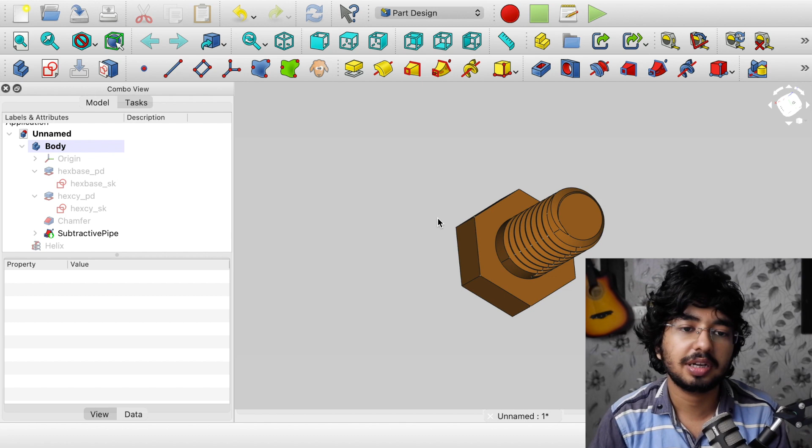So what you can do is nothing. So this is the nut which we are going to create. Again, why do I keep switching this? It's a bolt, not a nut. And also, if you are a complete noob to FreeCAD, I'll explain you everything, please bear with me. This tutorial will take a bit long because I'll be teaching you a lot of things, and after you learn this you will become good at FreeCAD and threading and how to cut stuff and so on.

Alright, so let's just start with this is how, if you open an application, this is how it looks. Alright, so this is the FreeCAD software, and you might see some different colors. It's completely free. You can just go to freecad.org and download it.

So now we will just go and create a new document. Okay, so we will create an application, and let's just save it, call it bolt. Okay, yeah, bolt, hex rod, or whatever. And also you can see whatever key I am pressing in the corner, so keep an eye on that as well.

Right my friends. Yeah, so this is not a programming tutorial, obviously, right? You guys are bored of programming, so am I. That's why I am doing this FreeCAD.

Alright, so in this basic workflow you have some things here. You have workbenches. So part workbench, part design, we will be working in these two, and most of the time you will be working in these only. So make sure you are in the part design. Click here, and if it is not viewable, then you can go in view, and see, you have a status bar at the bottom as well, so you can toggle stuff. Just try to explore here, and in the workbenches you can just change from here.

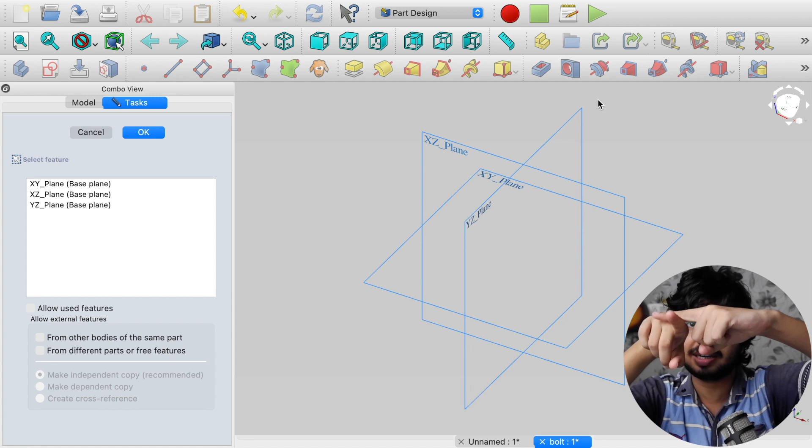This is the sketch button. So in sketch we draw things in 2D. Yes, in 2D. These are the axes, you need to understand this. So this is XZ, this is XY. The flat is XY, and XZ is in this direction. Yeah, this is XY, okay, you get the idea. You can select from here. We will be building this on a flat surface, so I will just go with this XY plane.

Okay, hit okay. Alright, now this is the 2D. This is a 2D thing. So you can view this in 3D as well, but you need to draw stuff here in 2D. So first we will draw this base, right? The back thing which we have here, right? So then we will cut it through. So we need something like this.

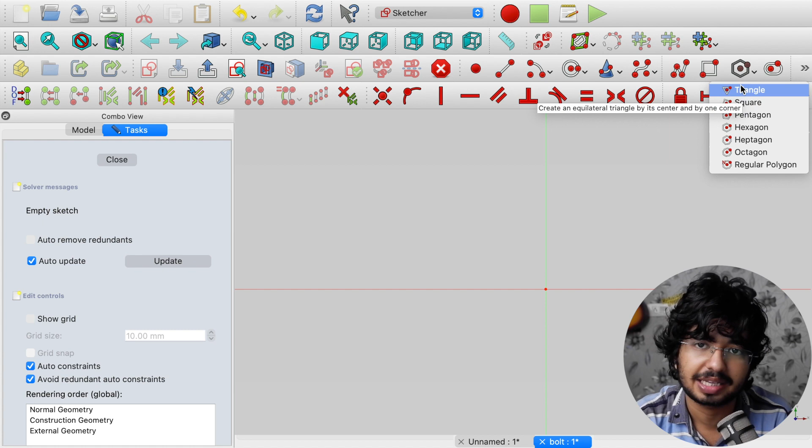So here we simply can click this tool. If you are not able to see, just click here, and you can drag stuff from here and move around, right? So it's pretty cool. And I'll just create a regular polygon. You have a lot of shapes here as well, so I'll use this, and I'll go here in the center. You can do this later as well, but I'll show you. You can draw here by clicking here, or let's draw here. You might not see because I am having color issues, and to get the arrow you just press the escape key. Okay, I exited from the sketch. Let's go back.

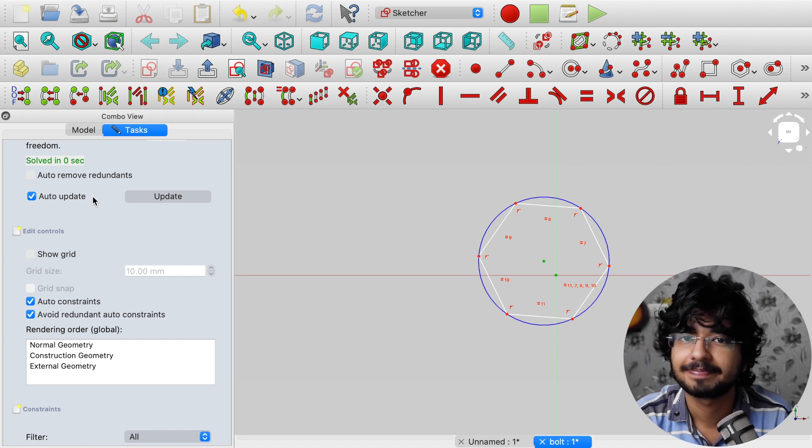Yeah, so I can drag this and I can move it around. Okay, but what we want this to be fixed. So we have something called constraints to make these things fixed so that they don't move or we don't create some undesirable things. Okay, and we can just change this radius of the circle.

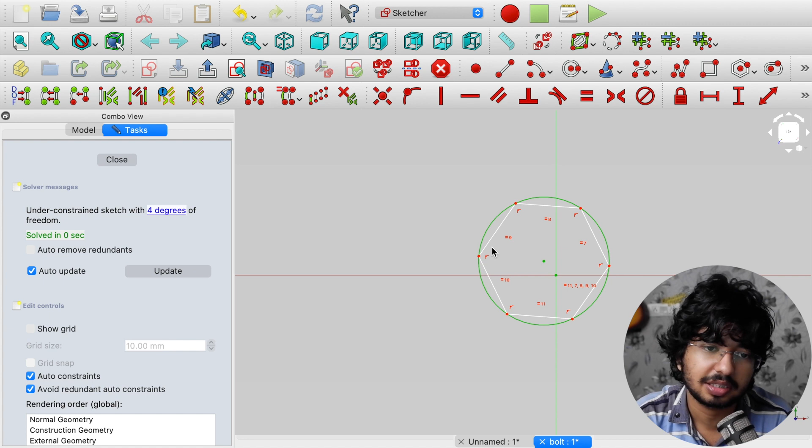So you need to come and click this icon. Here you will find this fixed diameter. I'll click on it. I need this, select this arc, and again go and click on diameter. So it is asking for the diameter of the hex.

So I'll just keep the outer diameter to 15 mm, and I am giving some name to it. It's always a good practice to give names. I'll hit OK. So it has become bigger now. And the thing is, I can't resize it now. See, I can't. It will just rotate.

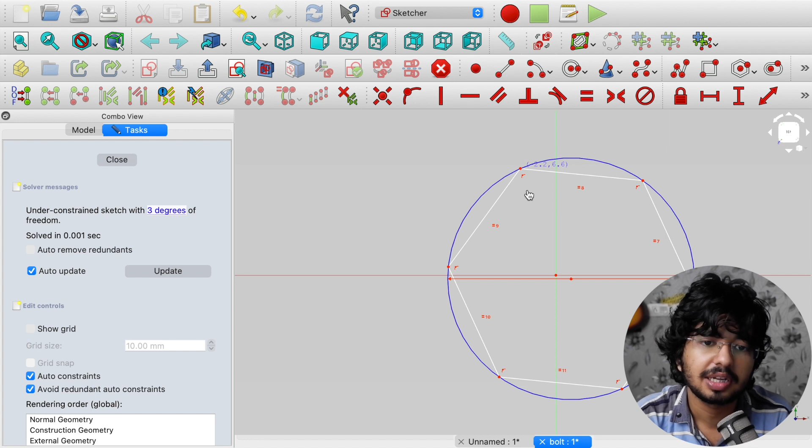All right. But also what we want is this and this to be fixed. The center should be the same. So you can just click this center tool. Let's just get rid of this. Okay, so you can press this, create a coincident, or you can just press C. Like you can also do this and this.

Alright, perfect. So everything is clear till now on how we made this to center, and now we can't do anything. We can just rotate this. So there is also a way to fix this. How can we fix the rotation?

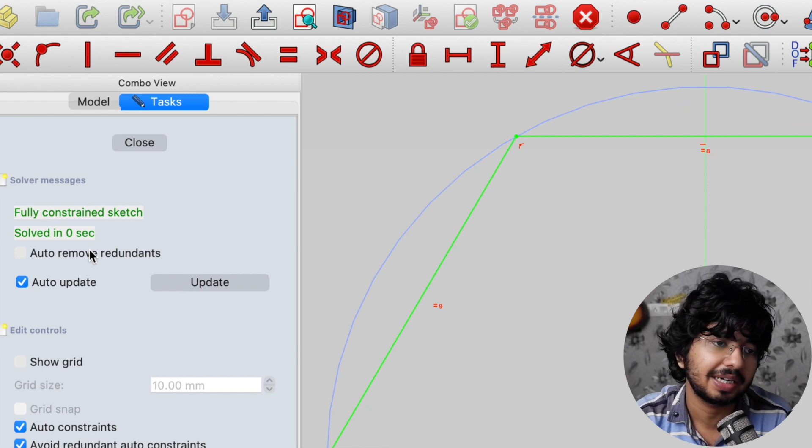So we can just make this line of the hex, this line, and here we have this tool. Guess what this tool does? Create a horizontal constraint. So horizontal is this, meaning it will become horizontal. And now you can see at the right, it tells you fully constrained sketch. This is the result which you always look up for.

So now I cannot move anything, and we have all the dimensions. If I can drag this like this, and if I want to change this again, I can double click and do stuff. Okay, cool, perfect. Let's close this sketch. Always make sure to close this, and let's name this.

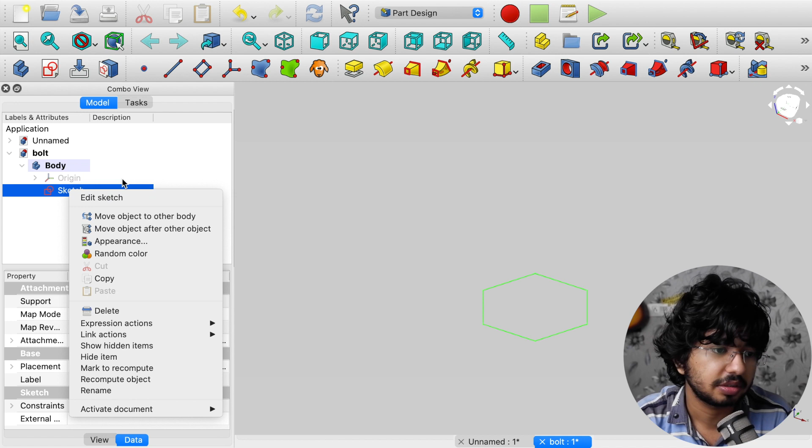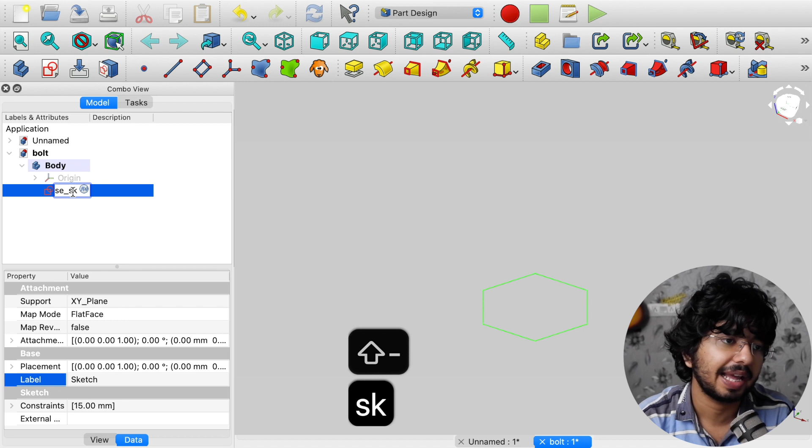You can right click and rename, or just, where is it? Yeah, here is this label. You can edit, or you can simply press enter, and let's call it the hex base. For sketch I am calling it SK. Pretty cool, hex base sketch.

Okay, so how do we extrude it? How do we make it like this is flat, and how do we make it go up? Yeah, one line we have got here. So this is in, you can see this is in white. So all we need to do is just create this, and we will do a padding. So what is padding? Here in pad it means this is a flat surface you want to extrude.

Yeah, so I'll show this in action. I click it, and you see what happens. And if you want to reset this, you can always press 0, or you can go to this. You can just press VF. You can press this. The scroll button just zooms in and zooms out, and you have to shift right click to move stuff.

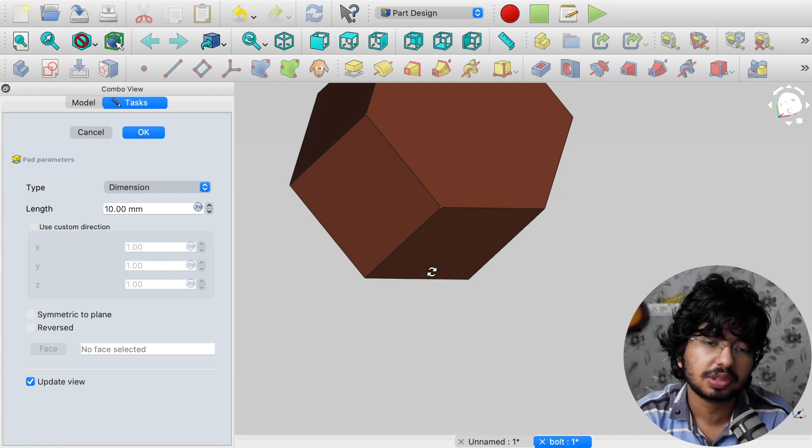See, shift, hold down the shift key and right click on your mouse and move. And if you want to drag, you need to click the middle button on your mouse. Pretty cool. So make sure you are familiar with this, and by just clicking single click you can select stuff.

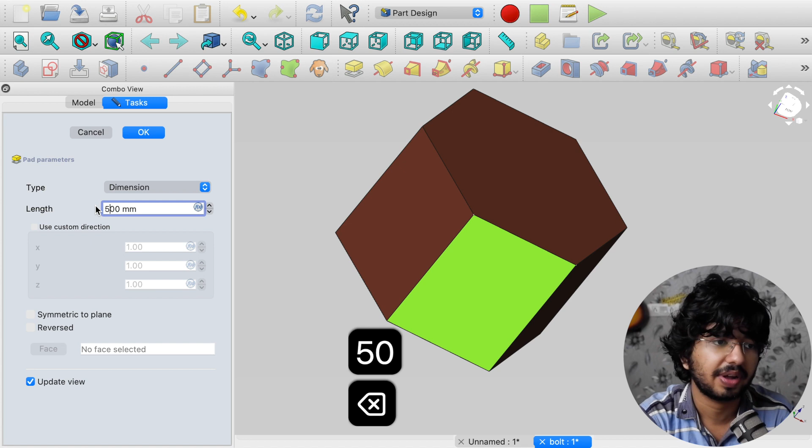Yeah, this is cool. So if something gets hidden, you just click here. See the cool animation. Okay, and you can also do a lot of stuff here, but we will look into it later. This is one part we got. I am middle clicking and dragging so it moves, and if I scroll wheel, see, yeah, cool.

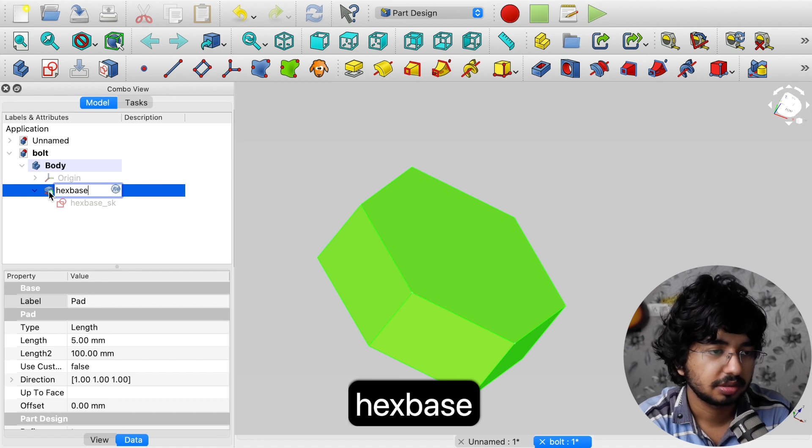Okay, we are done here, so we will just hit OK, and we will rename this again to hex base pad. This is all, or you can just say PD or pad PD. Let's make it PD. Okay.

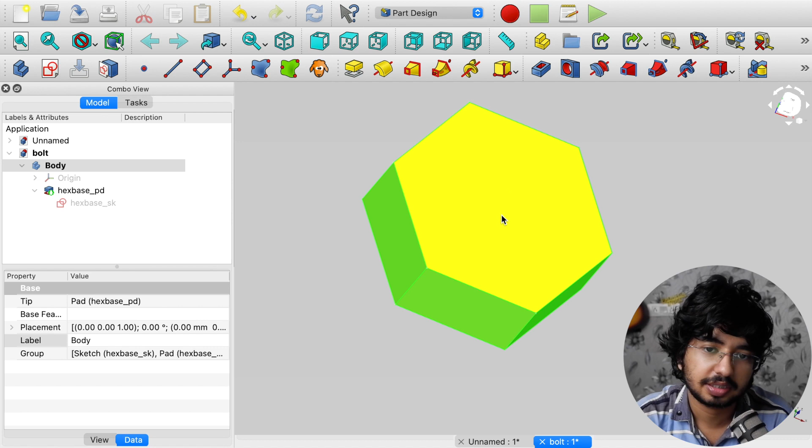Okay, and this is it. I guess this is not the end of the tutorial. Now what we want is we want to create a sketch, another sketch where we will build this thing. We will build this, then we will cut this portion out. Okay, so let's build again a sketch. Click on this sketch icon, and we want it to be here, so we can just click OK, I guess. No?

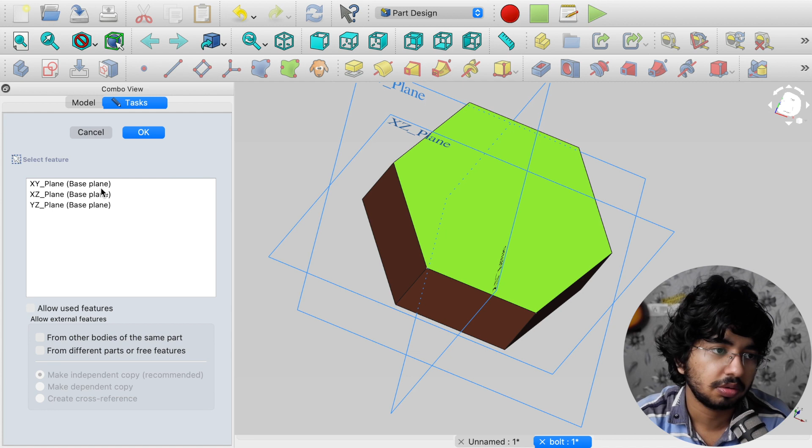Okay, so we are again going to click on the XY plane. This is the flat surface where we will build. Hit OK. So here you have one thing - what is this? The dot is missing. You just need to click this icon, this little icon, and it will show up stuff.

Now we will just create a circle. It is pretty easy to create a circle. Where is it? Here? No, yeah, the circle. This is the circle, create a circle. I'll just click on it, and I have this circle, so I'll drag and create.

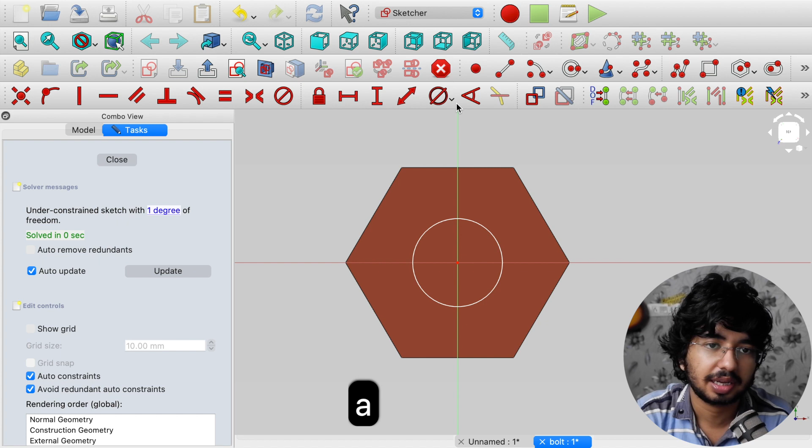Okay, so whatever thickness you want to give this, I mean diameter, this will be the diameter here. So we can just change it again, like as I showed you. I can just click on it and click on this diameter, and let's make it 8. Okay, cool.

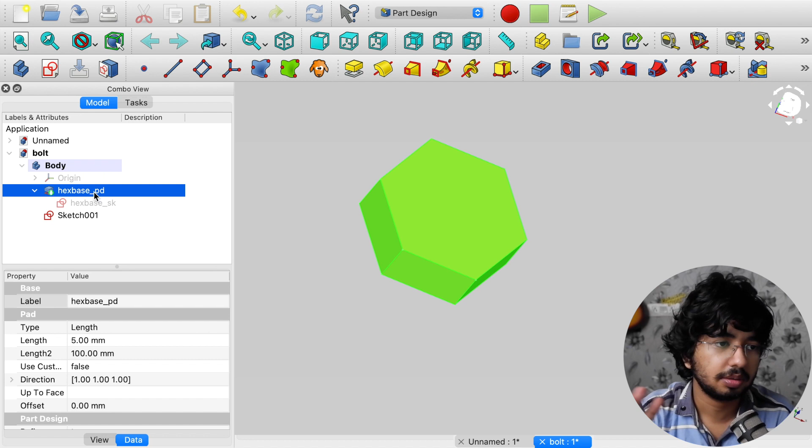All right, we have it fully constrained. This was easy, so now we can just close it. Okay, so the circle we made - one very useful thing which you need to know is you can press space and things will hide. It's like layer hiding, and this is the history we are creating on. To view the origin, you just click this. Don't get confused, this is the origin, the sketch we made on the XY plane.

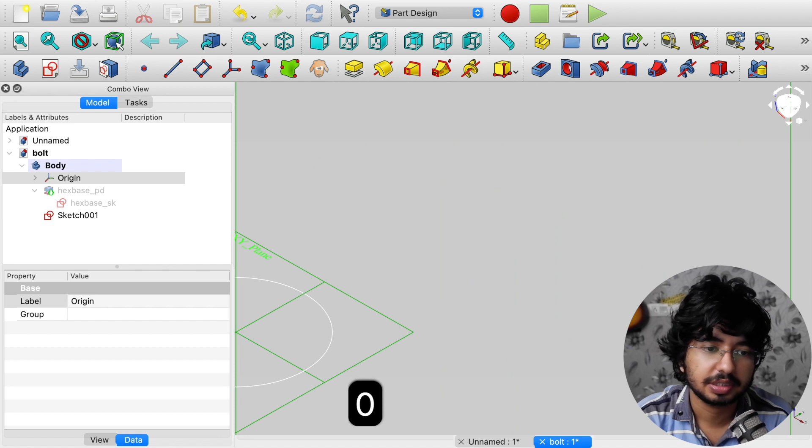Hit 0 to reset it, and let's rename it hex CY. Hex CY means cylinder sketch. Cool, pretty cool. And you may try to move this, maybe - let's see if we can. No, we cannot move this because this is in the XY plane.

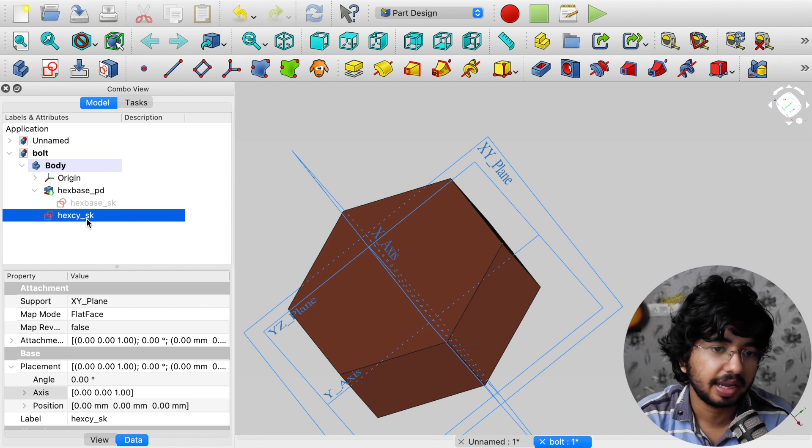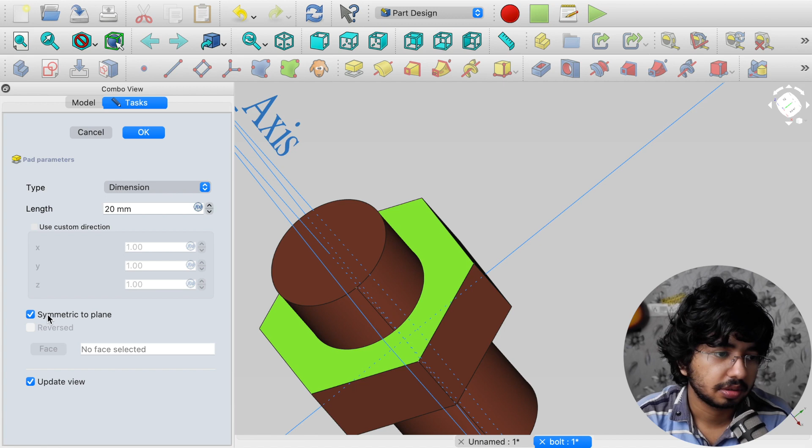Okay, if it's in some other plane, maybe you can, but I'm not sure. So alright, let's view this back, and if we rotate this here, so we have this. Okay, so we will do the same thing again - tell me what we will do. We will again create a padding. Okay, so this is what we got. Let's make it 20. Yeah, this is fine, symmetric to plane. No, this is fine. So this is what we get.

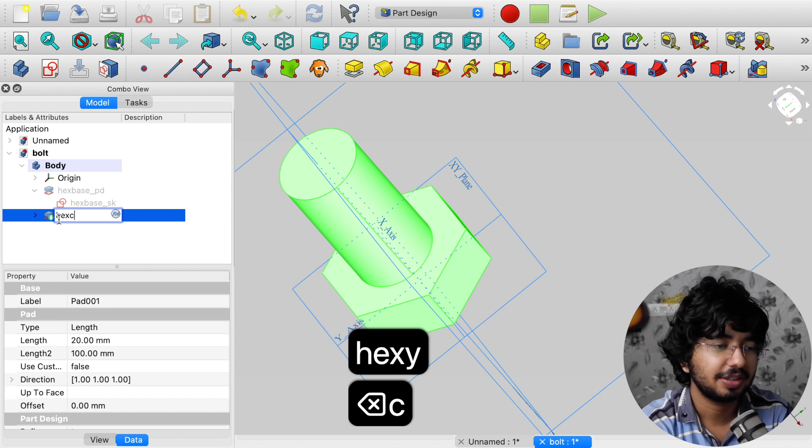Hit OK, and if you want to change the color, you can right click and click on random color. Right click, random color - yeah, see, this looks cool. Again we will rename it hexcy_pd. Not the best naming convention, but it's fine because we will be taking references from it. So I guess this is all clear. This is how we build this simple stuff. Right click, hold shift and rotate, and boom boom boom boom boom.

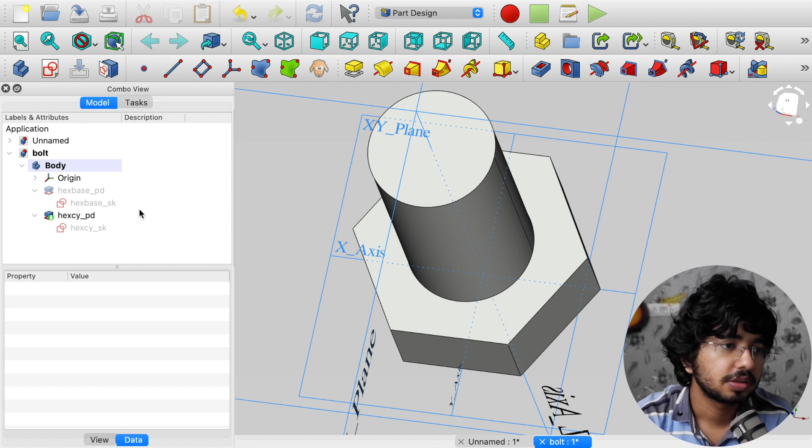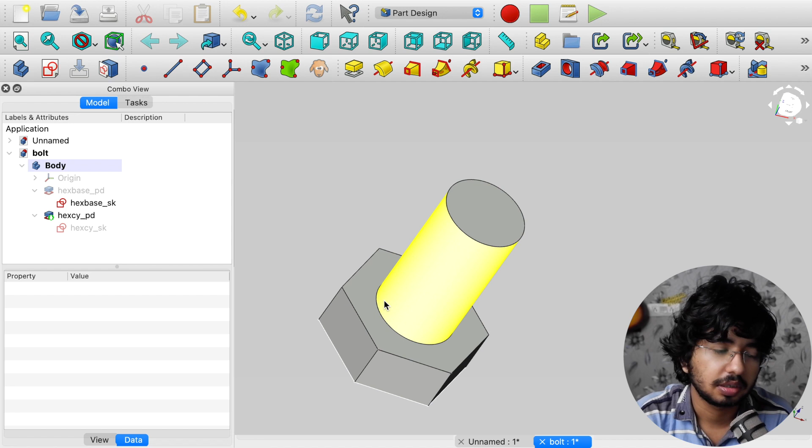So this was cool. And to make the threads, what we need is we need to create a helix. To do this, we need to go in part, and we need to create on this guy. Who is this guy? Creation for parameterized. Okay, yeah, just click on it.

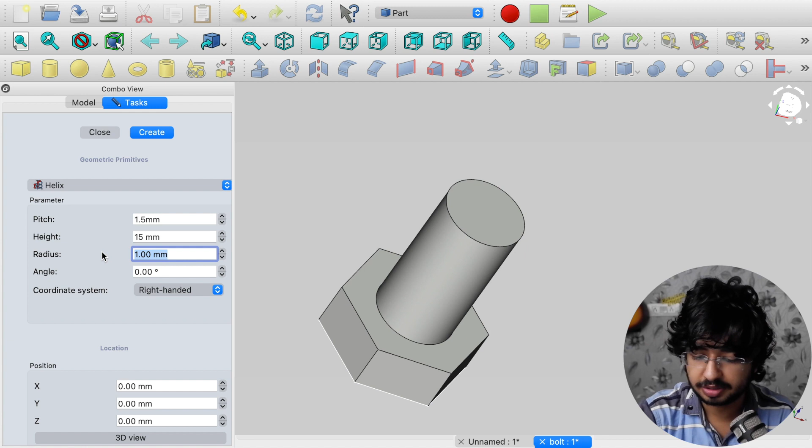So we want to create a helix here. And the pitch - what is pitch? Pitch is, guys, the distance between the two threads. Okay, so we will make it not 100 mm, that's too much, 1.5 mm. You can go to the standards whatever you want. And height will be, right now let's make it 15. And for radius, don't worry, we will just put expressions to it. So radius will be - how much we gave, 8 as diameter, so radius will be 4. Cool.

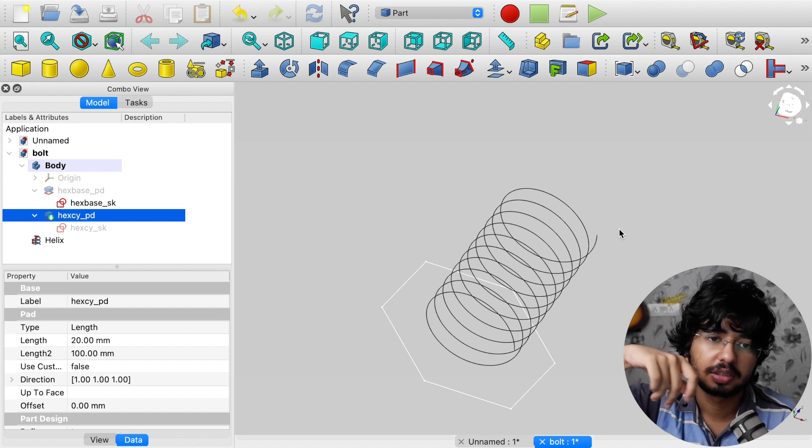Position, let's keep everything at 0 and set the radius to 4. Let's hit create. Alright, you get this, awesome, perfect. Now let's close this. If I hide this, you see this.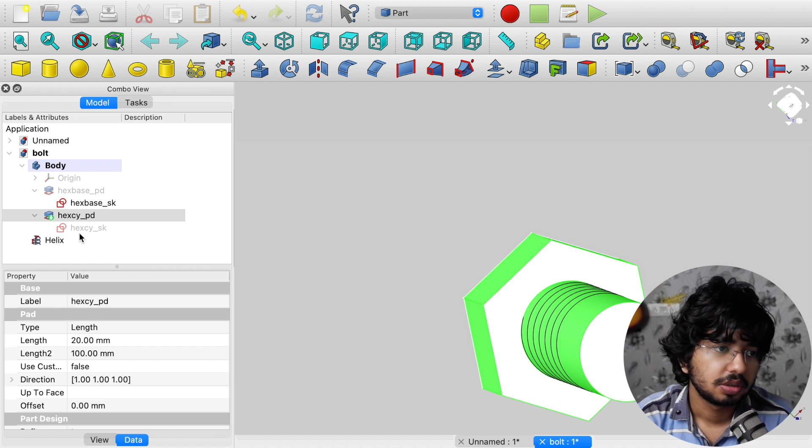This round stuff is the path it made, so that we can groove inside and cut in that manner. Okay, let's use this. What we want is, we don't want this to be going inside, because if it goes inside it will cause trouble. So whatever the pad is, we want to move it upwards.

Okay, or you can manually just put some stuff, right? But I will show you some standard steps you can do to make this solid. Helix, and you can rename this as well. Here is this position, and Z is the top. If I do this, see, it's going up, it is right. So you can manually just do this, right?

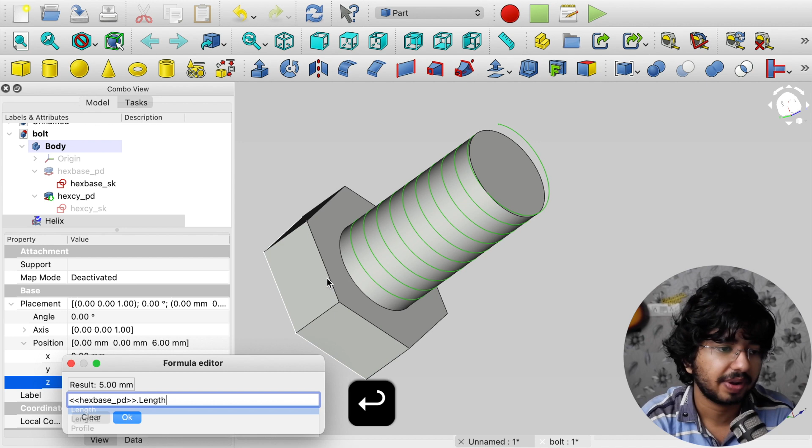But what you can simply do is press equals, or click this little fx icon. I'll press equals and it opens the formula editor, and I can reference the pad. So I'll type hexbase pad, you see autocomplete, and I'll type length. Length is the length of whatever pad we put, so it's the same, now we are at 5. Okay, cool, and this is the...

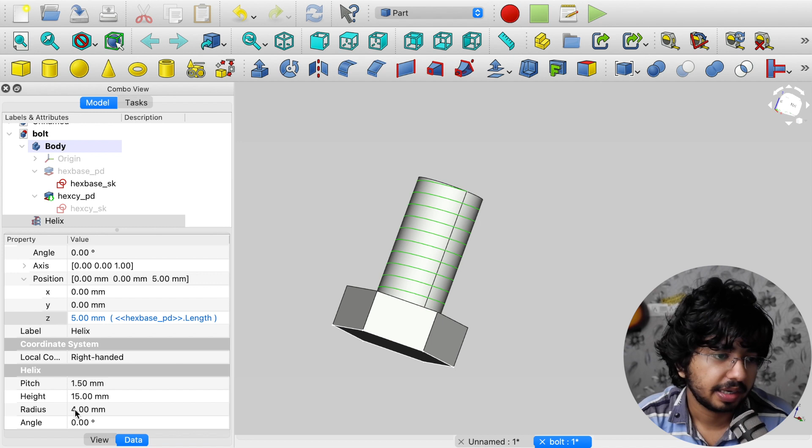Here is this top end. And what else we can do is, in the helix we were doing this radius. So instead of doing this, we will again take the reference from the hexcy sketch.

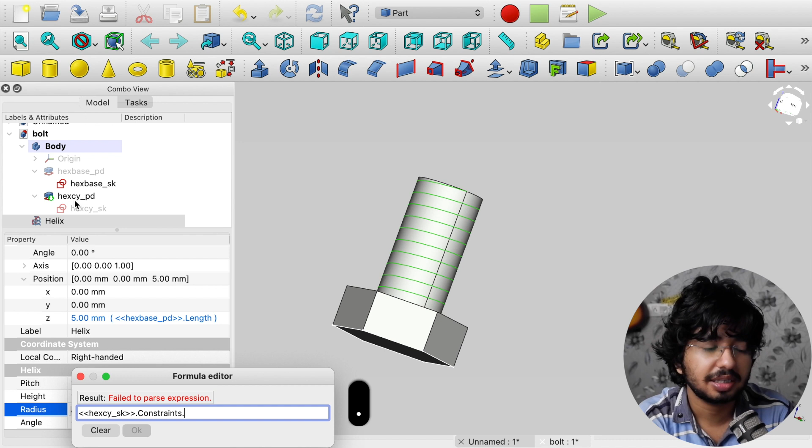So we will go to the sketch and just do constraints. To get the constraints inside our sketch, we do this, and then what we will do is put... what was the name, diam. Why is it not taking?

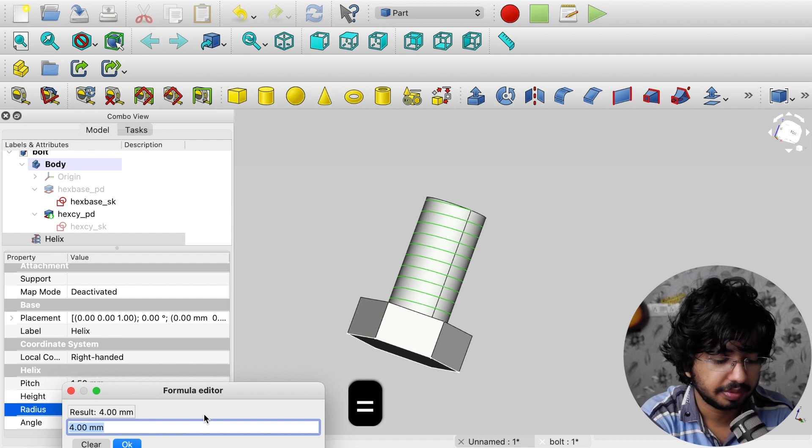Let's just go here, not here, in the hexcy sketch. Okay, so we forgot to give the name, so let's add a diam here and close this, and again go to helix, and in the radius we will do hexcy sketch, constraints, dot diam. Okay, and this is a diameter, so to get the radius we divide it by 2. Awesome, cool, see, no effect, it's perfect.

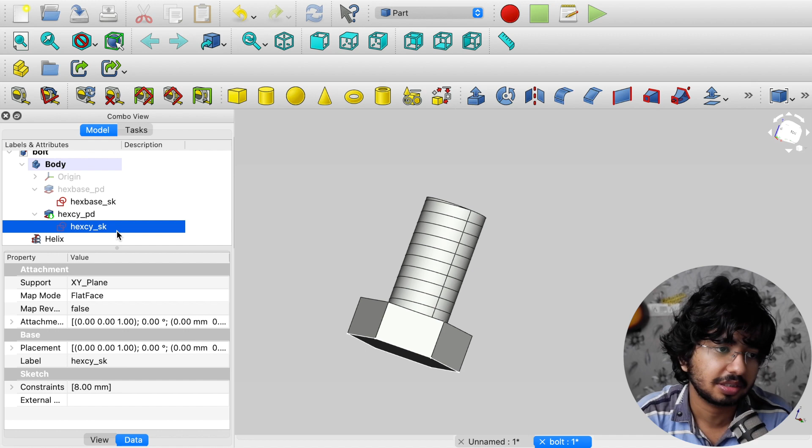So now what will happen if I go and change the radius or diameter here in this sketch? It will get automatically updated. If I make it 9 and go back here, so it is 9. So if I go into helix, see, it's 4.5, and obviously 4.5 times 2 is 9.

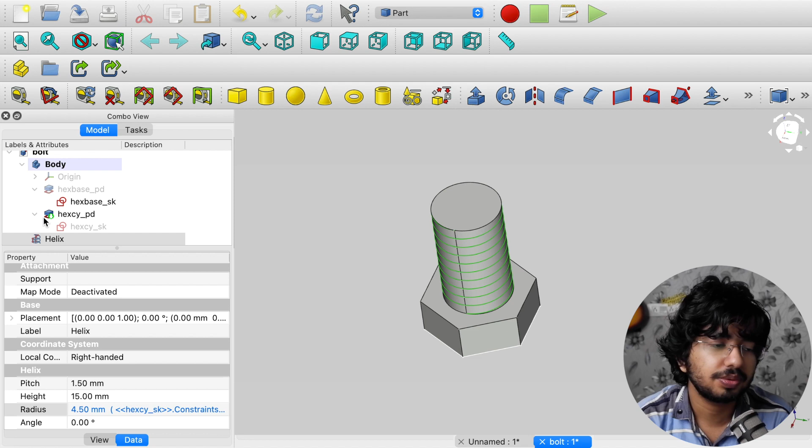Awesome, cool, alright, now let's see how we carve it. Okay, cool, so to do that, we need to create an element which will carve. So we will create a triangle. Now part design is done, so we will just go into the part workbench. Now we will go into part design, and we will create another sketch, and it will be a triangle which will rotate and cut out the parts.

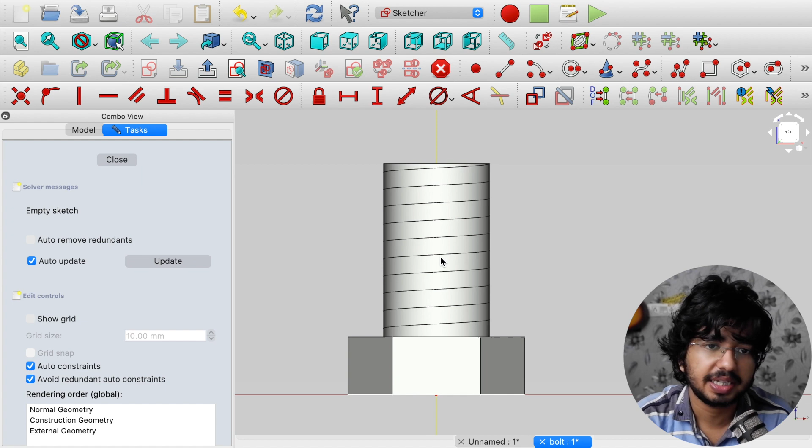You can make it in XZ or YZ, so let's make it in YZ. Okay, or let's make it in XZ. Okay, so we are cool here, and what else do we need? Nothing, you just click this guy so that we see everything in the center. Okay, you can also hide this, go and hide this.

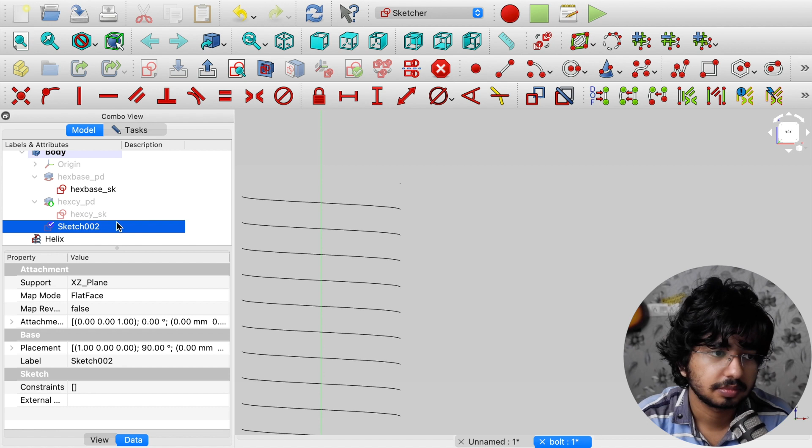And what we need is we need to put the triangle here. So I'll show you how, if you want to do it quickly. This is the tool called polygon in a sketch, and this should match whatever pitch we have, it needs to be an equilateral triangle. So I'll show you how to do it.

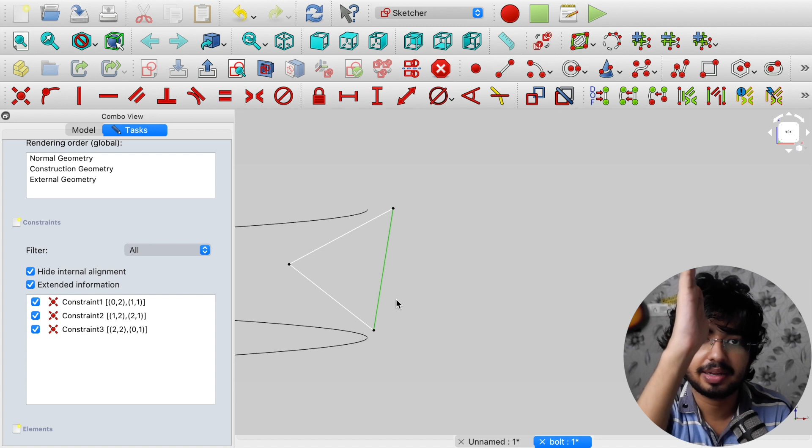Press escape 2 times, and I can do stuff here because there are very few constraints. If you scroll down, you will see all the constraints, you can hide them or delete them by pressing the delete key. Okay, first we want this line to lay vertical, so we will press this. Now this is vertical, and for an equilateral triangle we will select all of this and click this equal icon, so it makes everything equal.

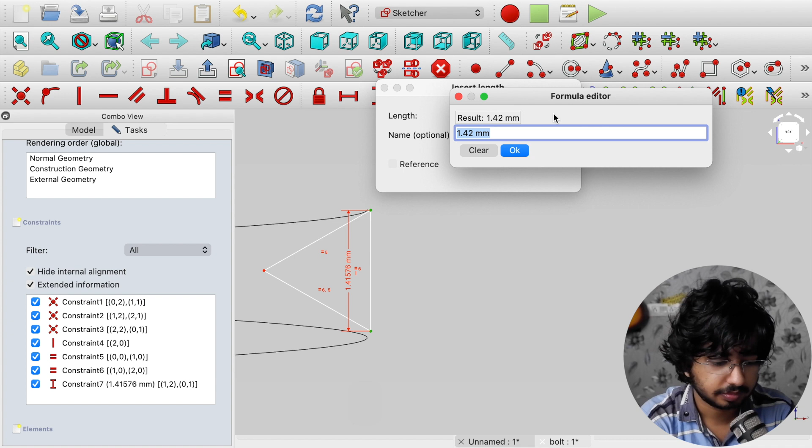Okay, now I can only resize it, but if I want to give this pitch length to it, we will select these 2 points and add a vertical constraint with shift V. And we will take whatever we added as the pitch in the helix. Pitch is capital P. See, it took 1.5.

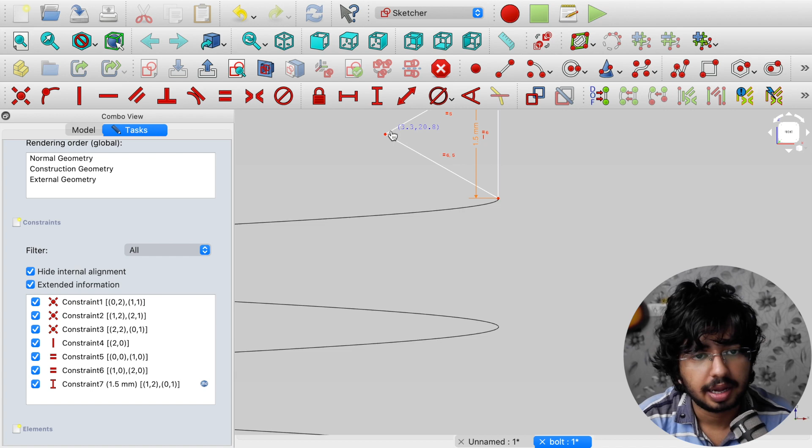So now we have this cleared. This is fine, and if we just position it here, and then we can just do it. But if you go here, it will show an under-constrained sketch degree of freedom.

So to fix this, what we can do is just click on this again. Okay, so center is here. So whatever the base, we can put a length again, the vertical stuff, and make it whatever we had, hexcy_pd, and we will do the length like we did before.

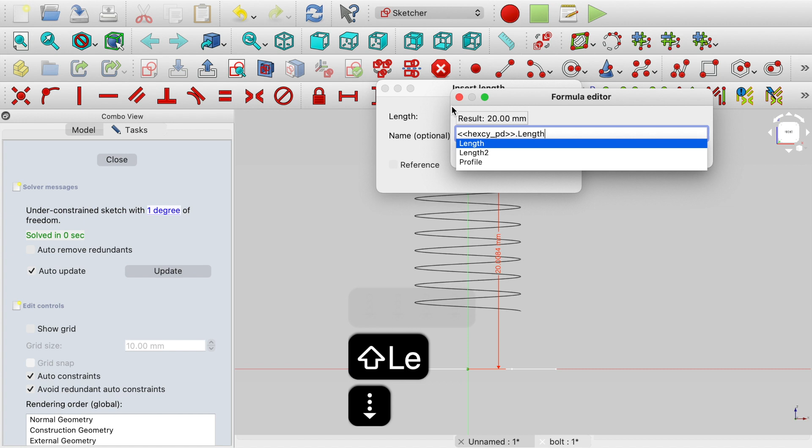See, it is there. Now I can move it only in this direction. I won't be able to move it up and down, right guys? Okay, cool, so we can fix this as well.

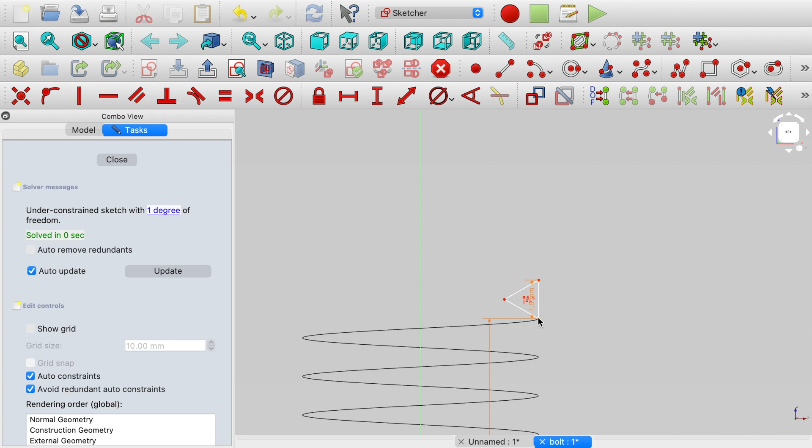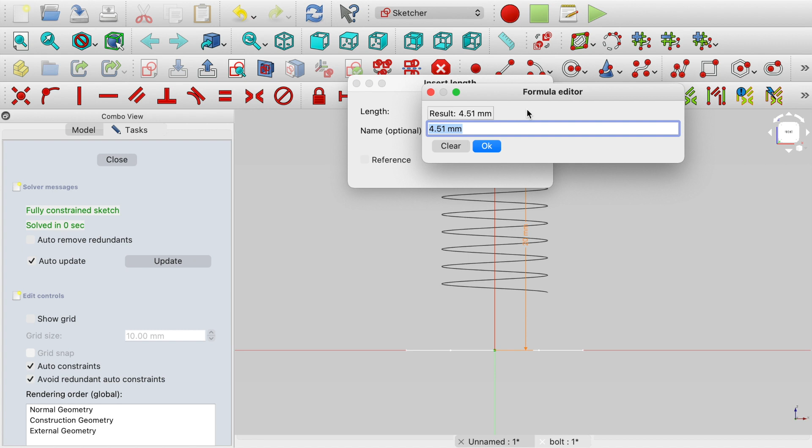So just click here and here again, and we will put, yes, horizontal. And again, what this will be, press equals to open the formula editor, and this will be the radius, right? So hexcy_sk, and we will do constraints dot diam divided by 2.

Perfect, see, now we won't be able to move it. Okay, cool, now we can close this. And now I will show you, we will have some problem here. This is the thing which we got, this is the line. Now we can simply select this, let's name it threader.

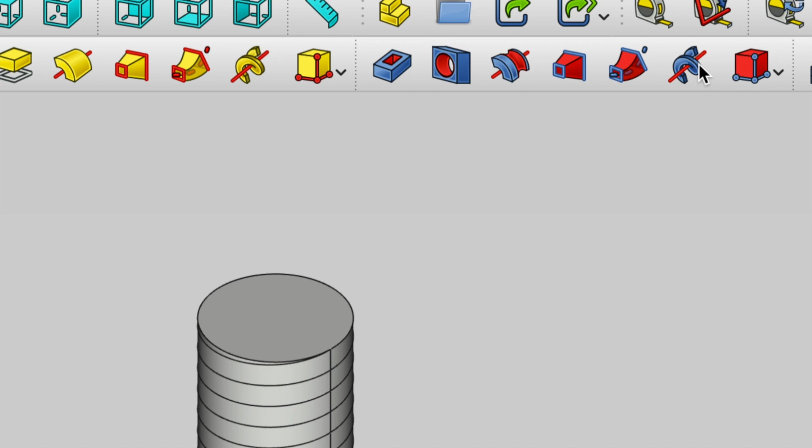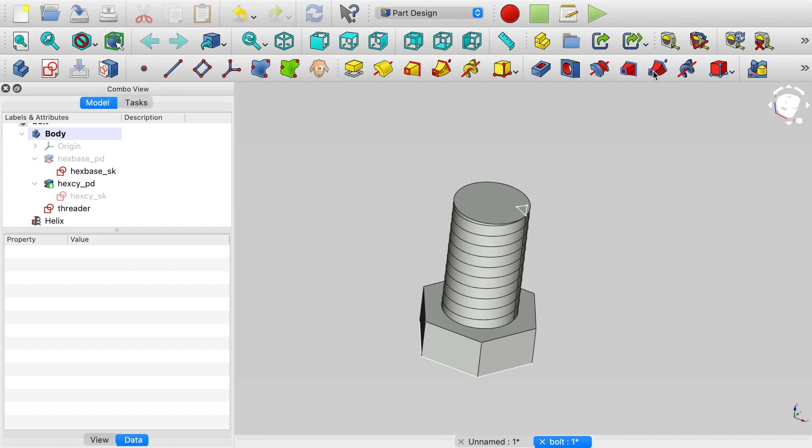And I can go here and take this subtractive sweep tool, which removes from the body, and see, this seems to be working. No, sorry, I picked the wrong tool. It should be this tool, a sketch sweep along path, the red one, this tool.

Okay, make sure that you selected the threader, and then go and click on this. In the profile, it should be threader, click on the object and select edge, this edge. See what it did? Yeah, so to fix this, simply go in the orientation and click on Frenet. Boom, loading, alright, so this is cool.

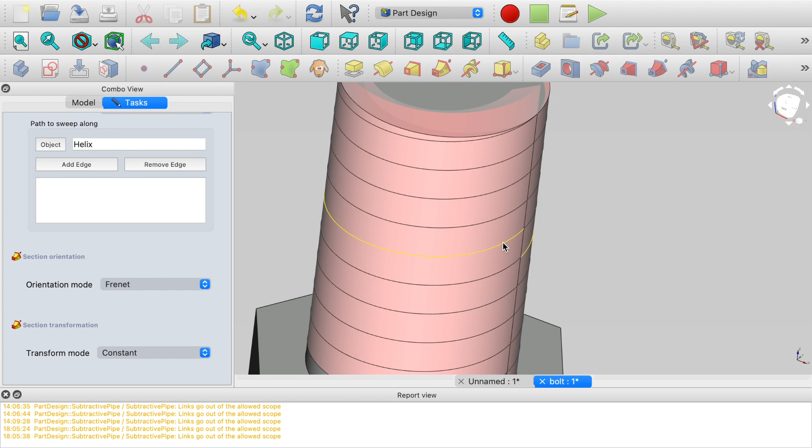And why are there no spaces? Because, see, if I do this and just create on cross reference, it should throw an error maybe, or it won't work. Yeah, subtractive pipe failed. Why is that? Because, see, there are no gaps.

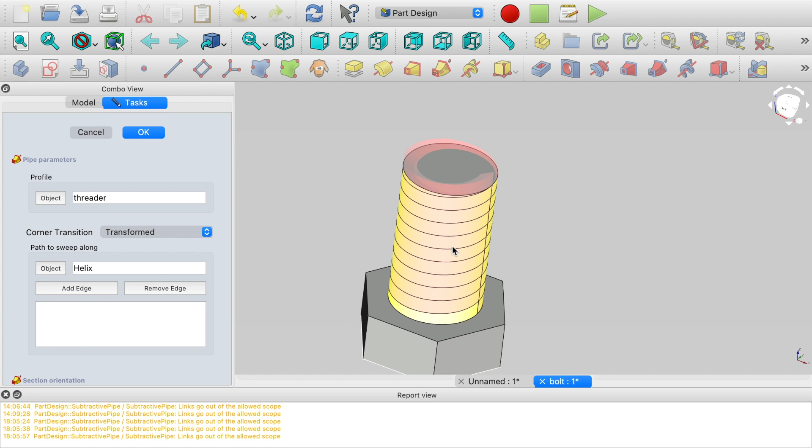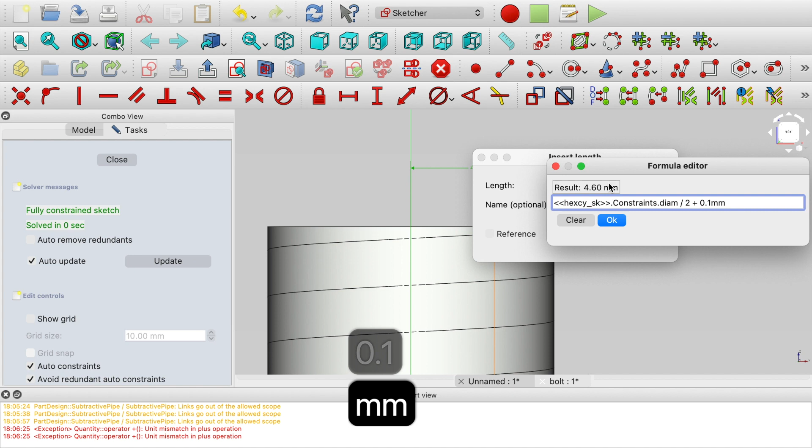So in the thread we have this, there is some gap. So to create this gap, what we can do is simply go in the threader, and instead of literally doing 4.5, we will just add 0.1 mm. Okay, and make sure if you are adding and subtracting, you will have to put mm. So it has become 4.6 now, and it is moved a bit.

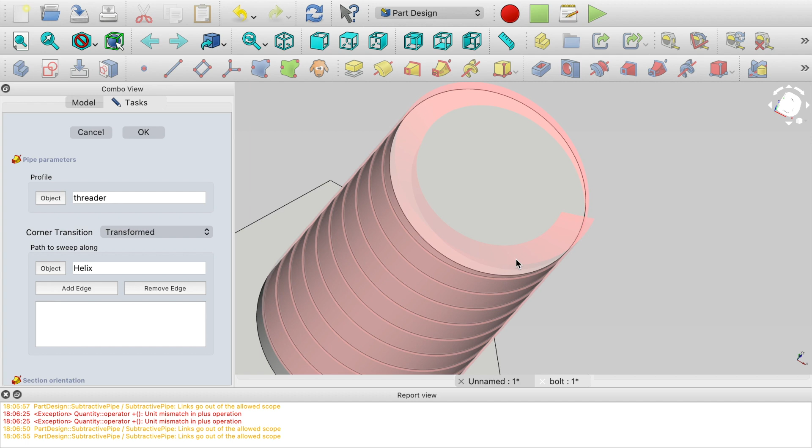Cool, if I close this, again go to threader, select this and subtractive sweep, and again this edge we need, and go here to Frenet. I guess again this is creating an issue, right? Maybe, let's click on OK, cross reference. Yeah, see, we made it.

How cool, you might be wondering why this is like this. I just don't know, this is like this. Okay, you can play around with the rotation too. Or what I do is, I just, you can do the... mm, this is called

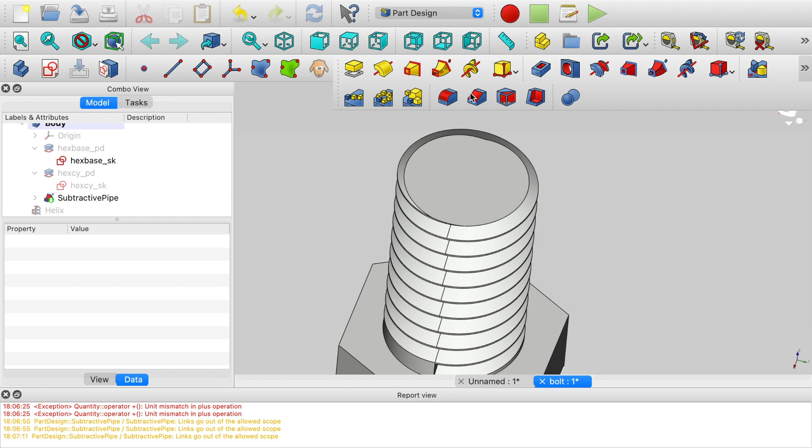chamfer. Yeah, so we will just hide this and go in here, and we will select this edge so that it is rounded, it is smooth, and click on chamfer. See, we made it, okay, hit OK.

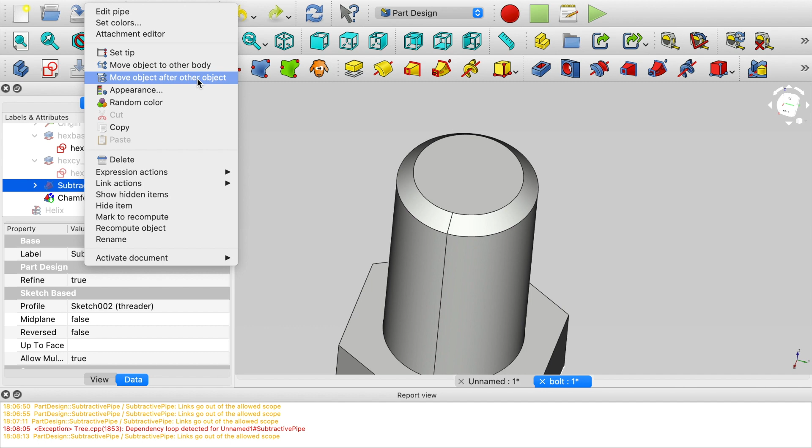So chamfer and subtractive pipe, and what we want is this to come after chamfer. Subtractive pipe, how do I move it? So you can right click and click on move object after other object, and you will just select this chamfer because this is the last thing and we want this to be moved.

Okay, and I can enable it. See, cool, there is this bit thing happening, but I guess it won't be visible. So this is how we made this. Okay, so this was pretty cool, I guess, and you can just go ahead and print it, and if you plan to change any stuff, it will be pretty easy.

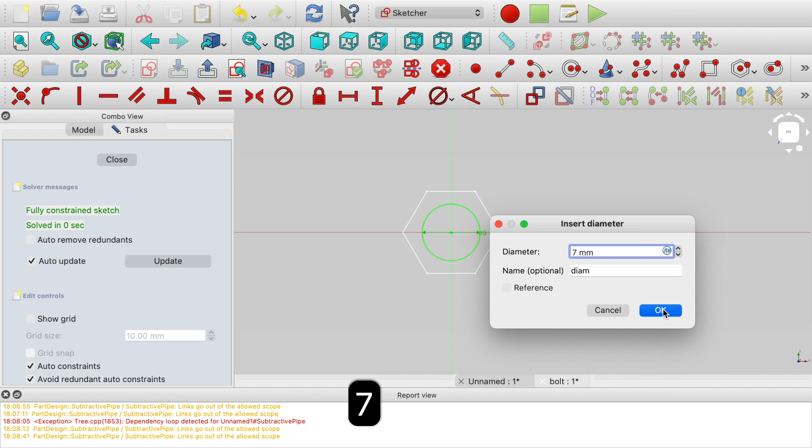If I want to make this really small, I'll just go here, or I'll just make it 7. Okay, hit OK and close it. See, everything is perfect because we used constraint and we referenced it. So cool, and I'll just press, or you can just go here and you can also change it from here in this constraint. Here I have diam.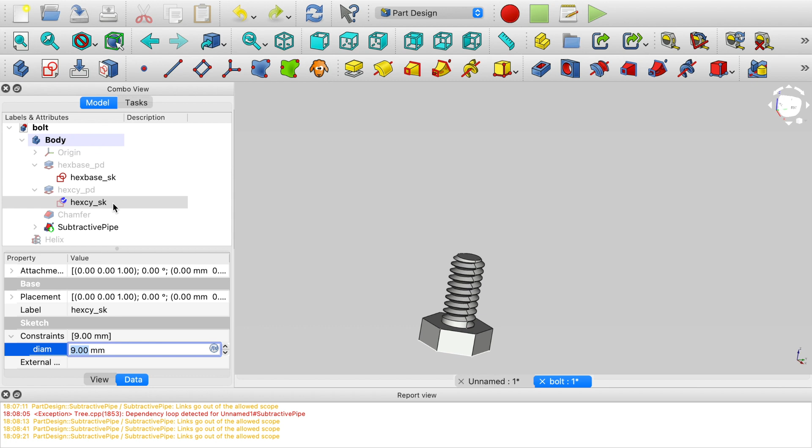Why is it showing 9? Let's go inside. Okay, so it did not update, there's a bit of a bug. So yeah, this is fine. Let's hit 0. Yeah, this is cool.

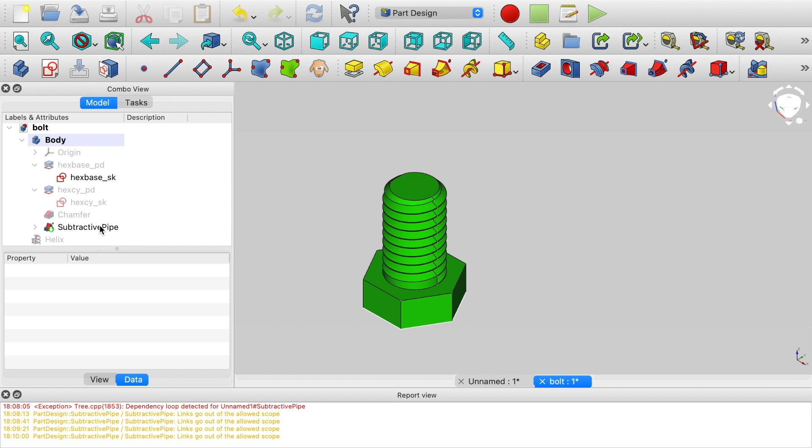You can again right click and select random color. Yeah, this is green now. Or you can right click and click on appearance, and just change the color from here.

See, you can maybe... can you also color the top? You can also change the material. Wow, this is so cool.

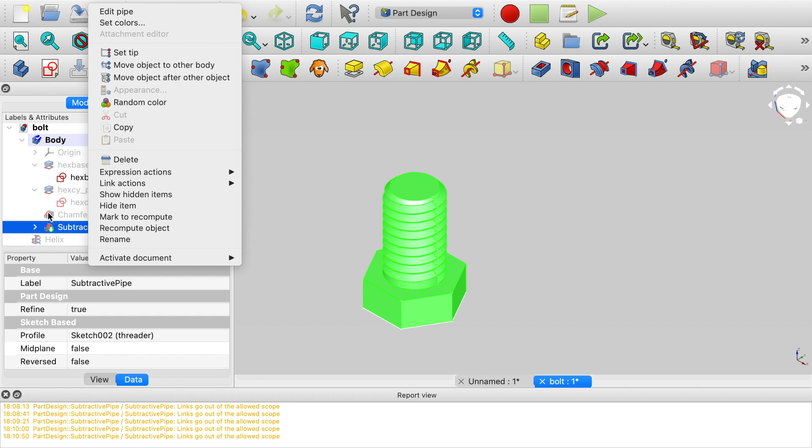Let's go back here. See, this part is aluminum, right click and go into appearance. No, it won't work. Why? Because in the task we have this. So close it, go again into appearance, and yeah, we can make it aluminum.

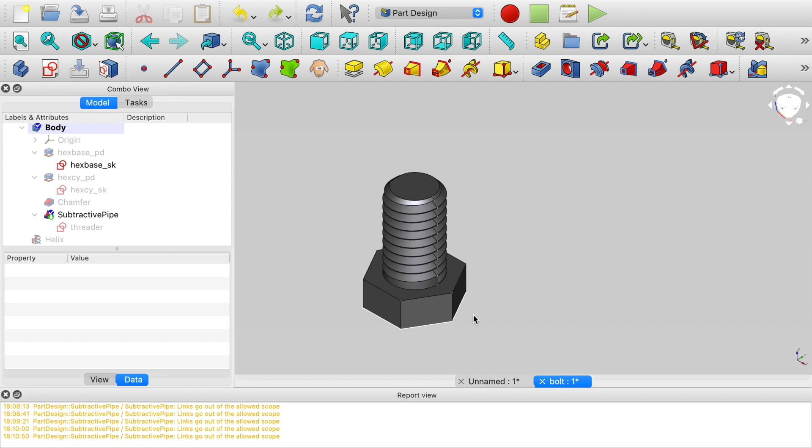Does it look like aluminum? Yeah, it does. So the whole thing is now aluminum. See? Or we can also go here and in appearance make it gold.

Wow, this looks awesome. So let's keep it like that. This gold one is really cool. You can also play around and make it wood and stuff like that.

Alright, so one thing I did, I had to cut this again. To cut this, we use pocket. So we will just go and create a new sketch.

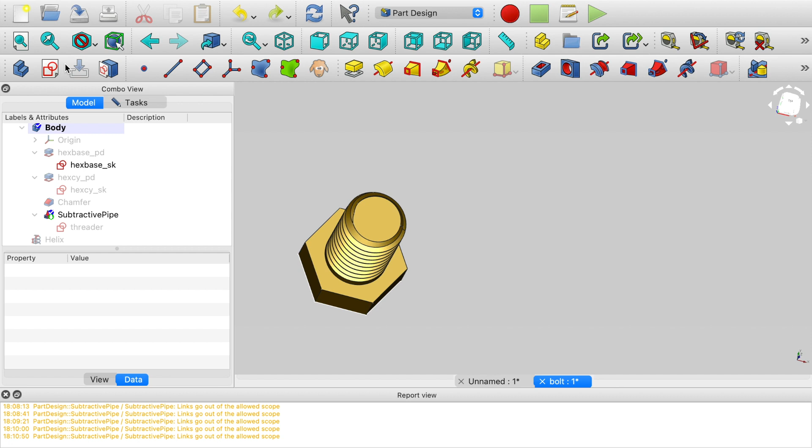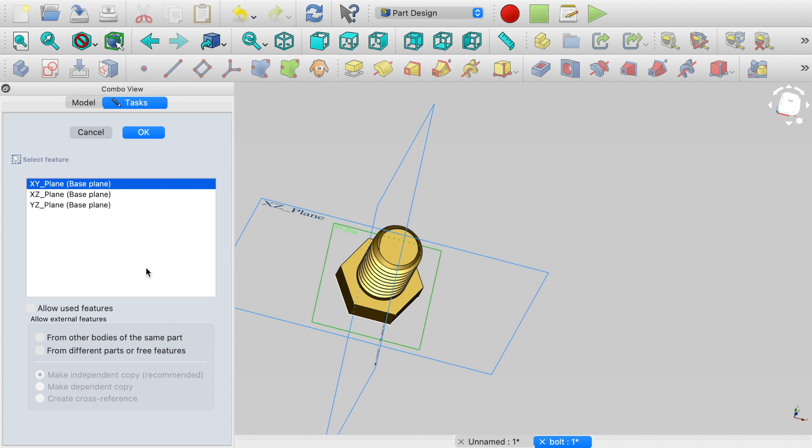Let's close this first and create a new sketch. It will be the same XY plane because we will just build this and cut through all. Hit OK. See, we got this, let's hit this icon, and yeah, you get the point. And we will just create a rectangle.

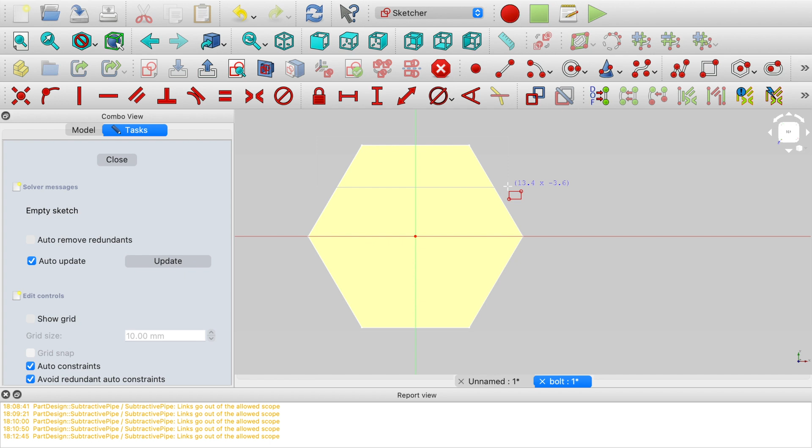So it is like this, and you can add constraints if you want. I'll just show you how to do this. Let's close it. We have this at the bottom, here is this sketch, and all you need to do is click on this pocket.

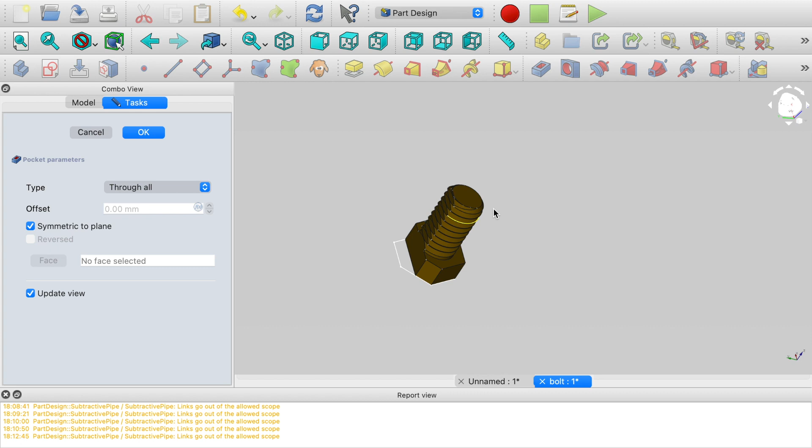So I'll do through all, symmetric to plane. See, we get this. The whole thing is gone from one side. It's cool, so that now we can print it from this side, laying around without any trouble.

And what I have done in my project, I have cut this from here as well. You just need to cut this part, the 1.5 or 1.4, whatever thread value you have taken, whatever distance they have, they'll just chop it. And on the side, the screw works perfectly, guys.

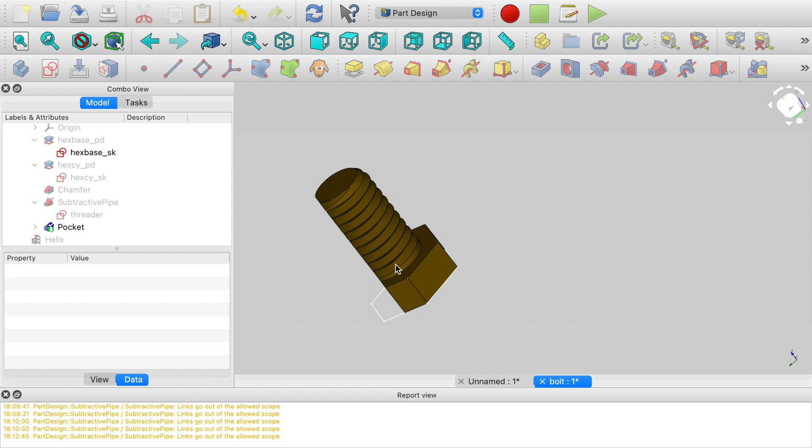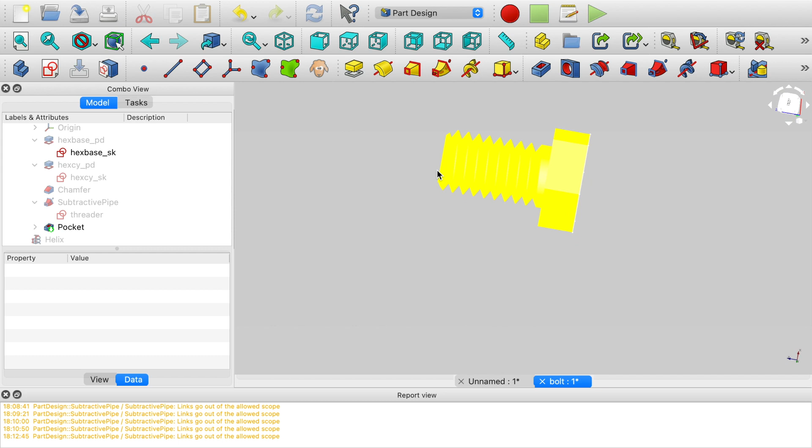So if I just hit OK, and we have a golden... not golden, why is the color gone now? Maybe we need to set shaded flat lines material. Let's make it... so it's glowing too much. So I'll just hit Ctrl Z, and we have the gold one, which is pretty cool.

So you get the idea. And the pocket went away because I pressed Ctrl Z. So I can just go again to pocket, and go into through all. You can also put some dimension if you want to cut through this part only. And for some reason I'll have to do symmetric to plane, so this cuts here, and I'll just hit OK, and we are done.